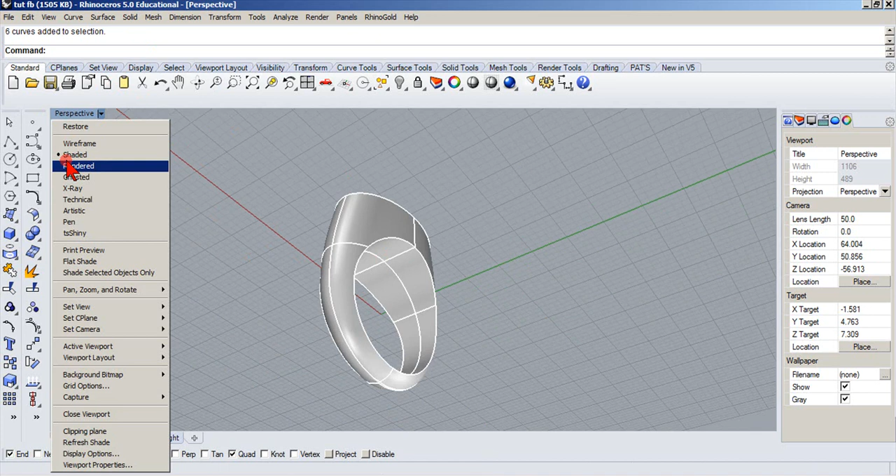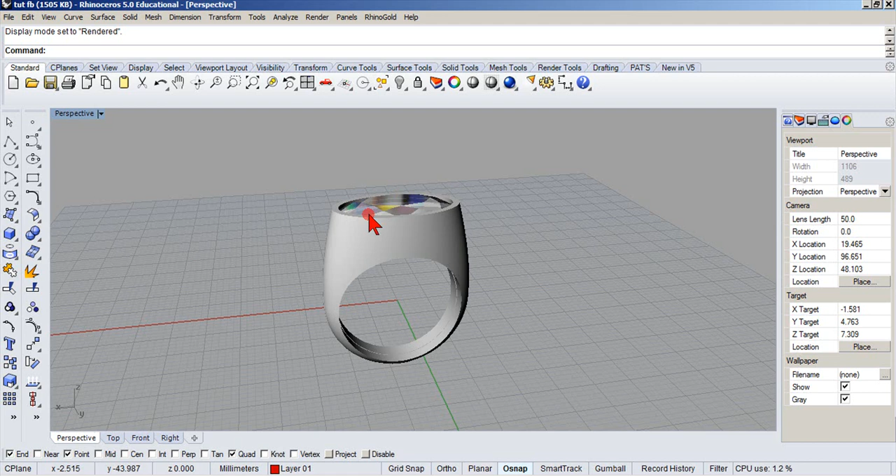Hello. I'm going to show you the tool I use to make this type of ring. I like a man's ring, and sometimes a lady's ring, with a solid back on it. But when you make these rings, if it's all solid inside, it's going to be a lot more expensive on the weight, and it'll be top heavy. So if you look at a class ring, a typical round or oval class ring, it's actually hollow inside the top half pretty much. I'm going to show you how we create this same effect with the tool that I use in Rhino here.

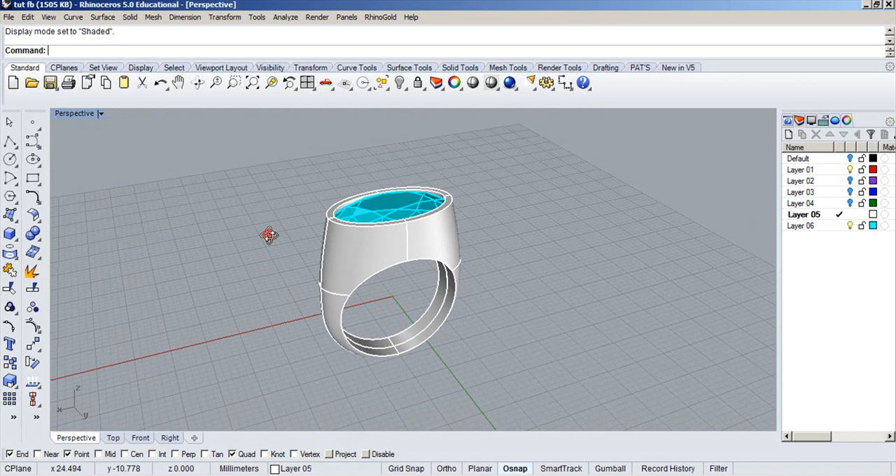I'll show you how to do it. First of all, we've got to learn how to make the ring. Let me show you what this looks like when I say hollow inside. You can see all that has been eliminated, down the shank. I could even hollow it further down the shank, but that's up to you. I'm just going to show you how to do it, and you can do what you want with it.

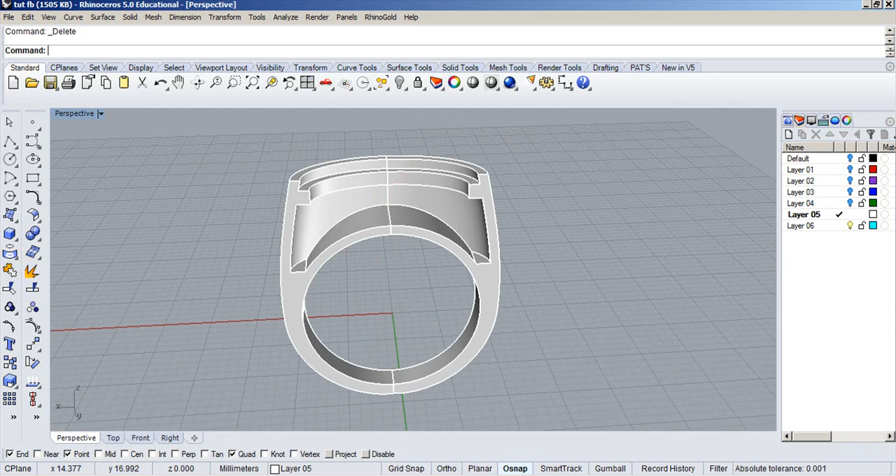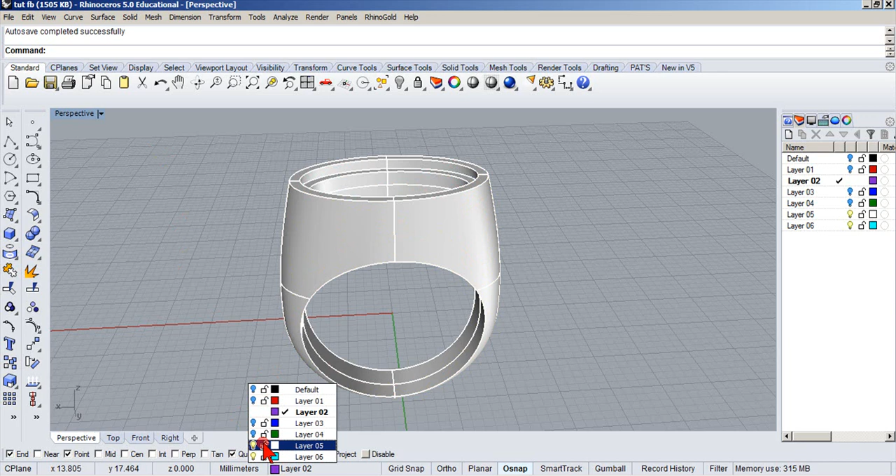So what I want to do is show you how to make the ring to begin with. I'm going to hide that stone, and we're going to hide this. We're actually going to start off by making this - this is the foundation for our ring. We're going to draw these curves, and then we're going to go from there. It's relatively easy, and hopefully we'll get through it without too many mistakes, at least on my end of things.

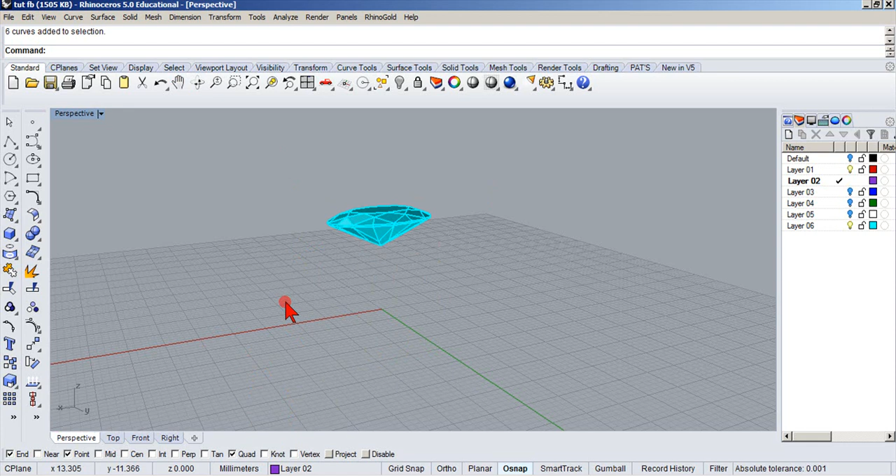So let's get busy, we're going to draw these curves, and I'll just hide this for right now. Now I do have a stone - it doesn't matter what you do it with, but for this I'm just showing you what I have. This oval stone measures 17 by 10. Now I'm going to want 1 millimeter around it to hold the stone in, on this bezel, so to speak - we'll call it the bezel, the rim. So anyway, let me hide the stone.

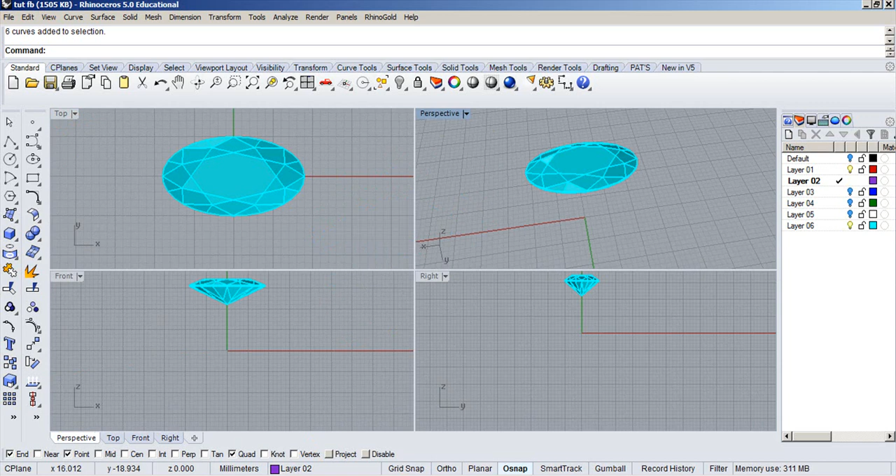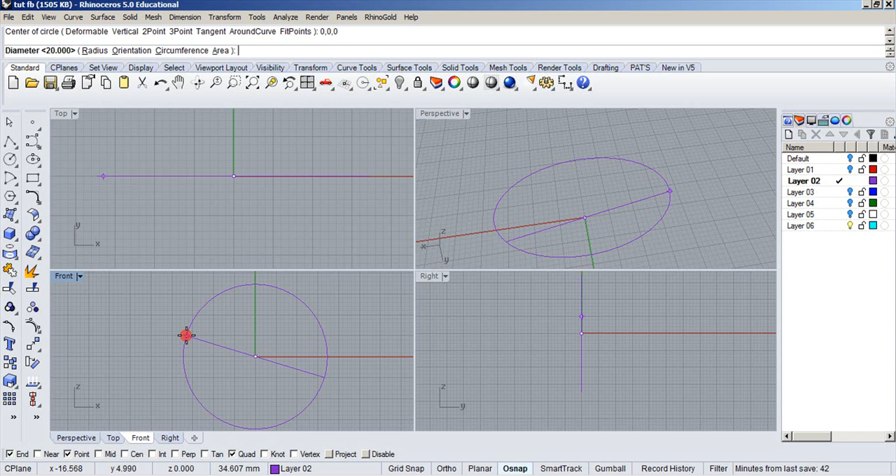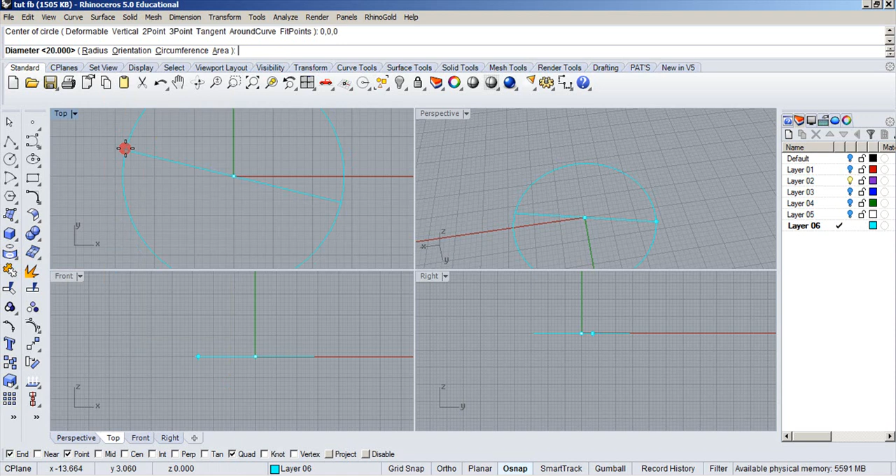We're going to start off with about a 10 millimeter, size 10 man's ring, which is approximately 20 millimeter. We're going to put 20 millimeter and round it up from 0, and type in the diameter of 20. There's our diameter 20. Let me change this color here, but what I should do is change layers.

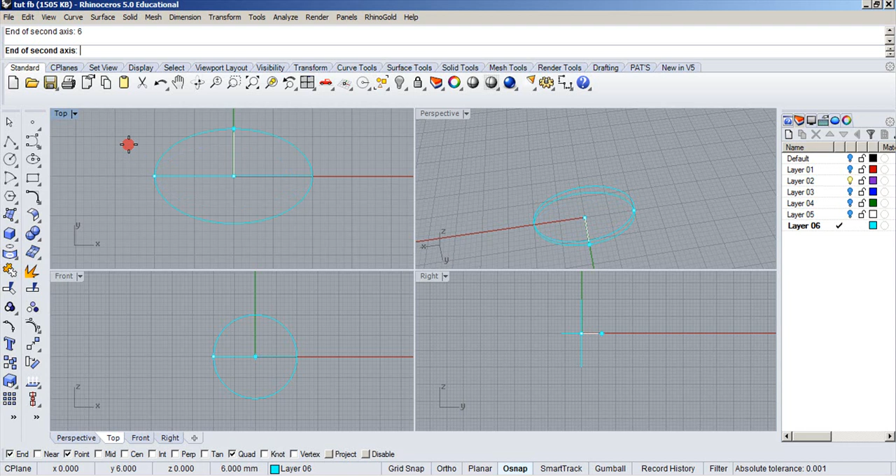We'll go with a circle from the center, and we'll go with 20. There's the finger size right there. Now we want to make the oval - the stone is 18 by 10. We want this oval to be 20 by 12. So starting from the center, we're going to go 20 by 12. And there's our 20 by 12 oval.

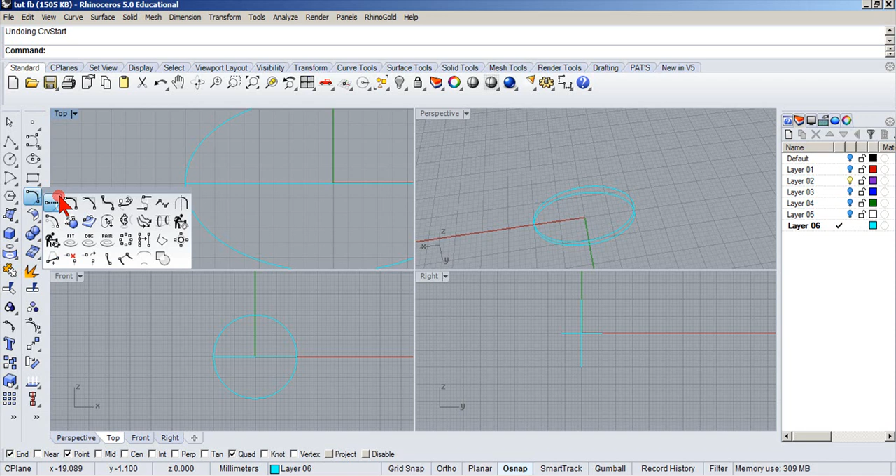I want to turn this on for a second to find out where this point is. Now let me see if I can do this. I want to go over here and move that point a minute, if I can find it. I'm going to go with this one - the seam, basically, there's a seam. I just want to move the seam out of the way a little bit, so it doesn't mess us up when we're doing any of our cutting.

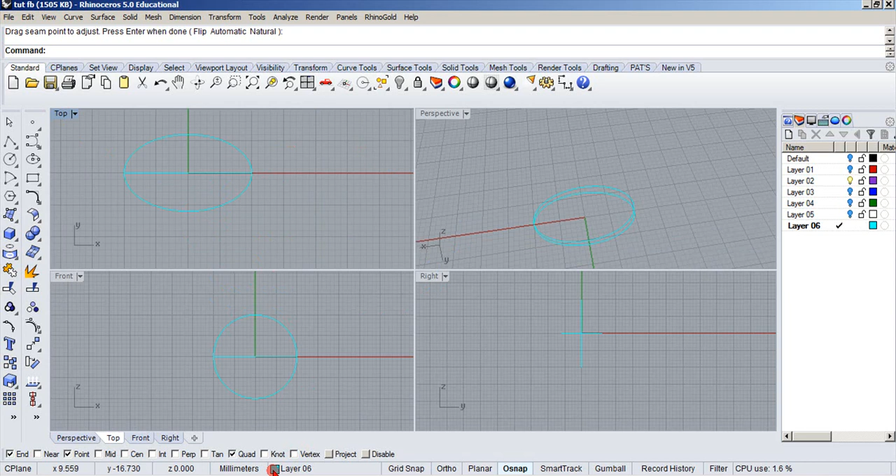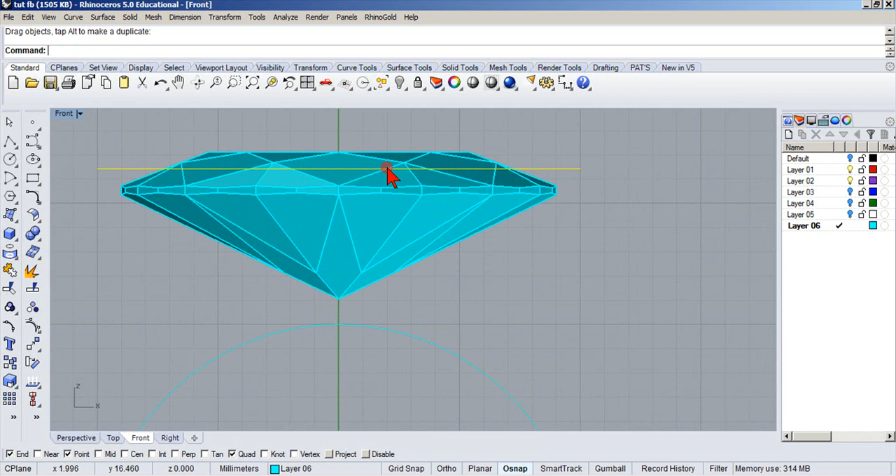Alright, we've got that. Now I've got that gemstone, let's bring it back in. I want the gemstone 1 millimeter off the finger rail, so we're not hitting the finger or going through the finger at all. There's my oval, I'm going to bring it up, and I'm going to bring it up about like that. Do it where you want - you'll see at the end what's going on. Just so you can get a good idea where we're at on this thing.

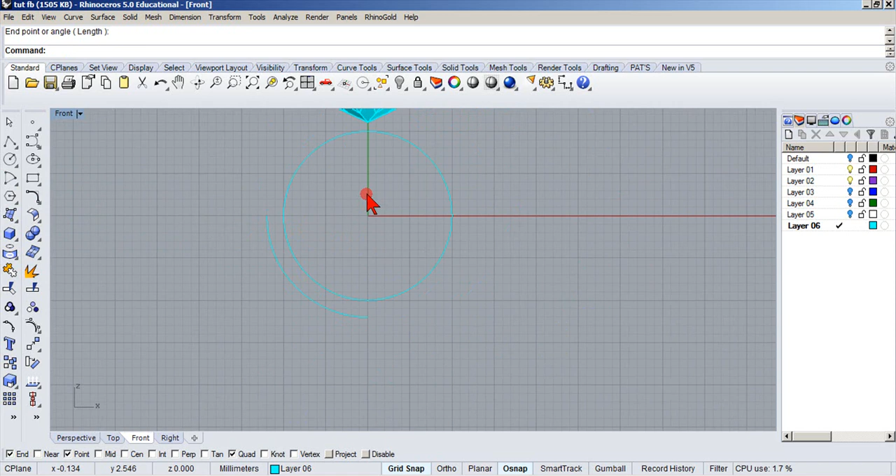Well, let's make a shank, or continue on - take an arc. I'll put my snap on, and I'll just make it 2 millimeters for right now. You design it how you want to design it. Now we're going to turn on our quad, yes, and our end. Come over to this tool, I want to extend it. I'm using Rhino 5 right now, but 6 it's a little bit different, 7 - but they're all the same, the tool layout is just probably in different places.

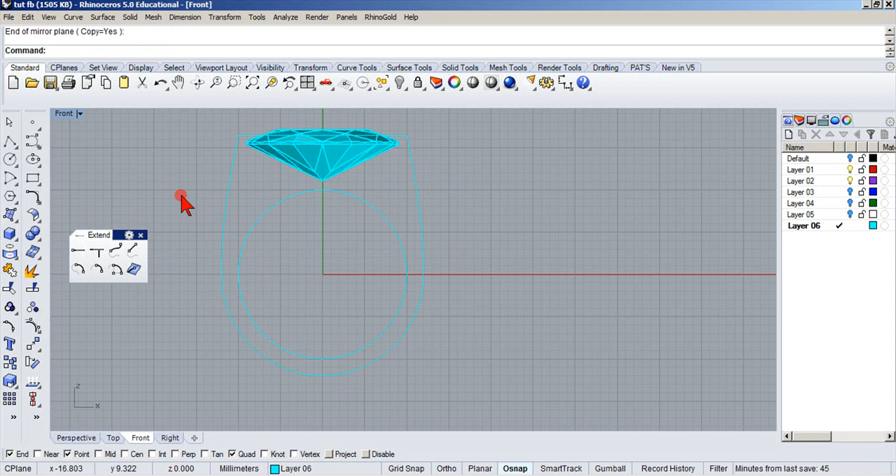I'll turn on my snap, and I'll come up here, and I can grab that quad there. And then I'm going to mirror this from here to the end. So this is what we have so far. Now I'm going to hide that stone again.

I'm going to put a point right down here. If you want to put a point, go for this quad and that quad. So you can see I've got a point down there and on the two ends of the quad of the oval.

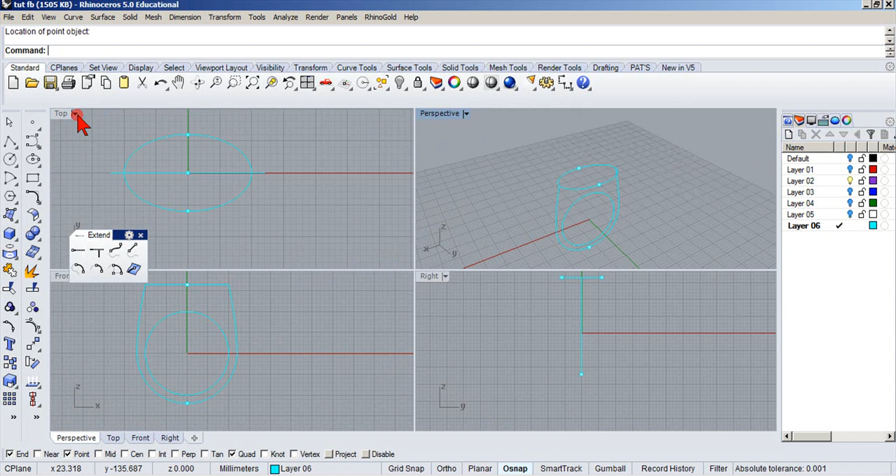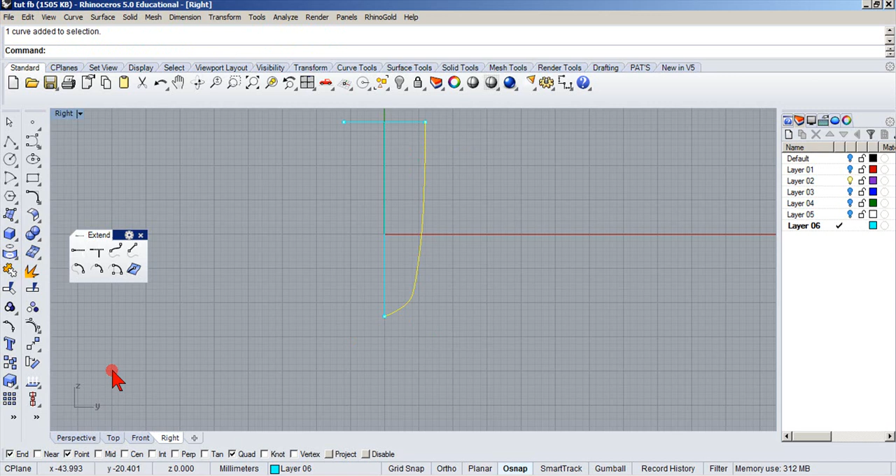Now one last curve. We'll take our curve and grab it from the quad. You can design this however you want, but we'll do it like this. Right there. Now I'm going to mirror this from the end. Mirror it. And there it is, right there.

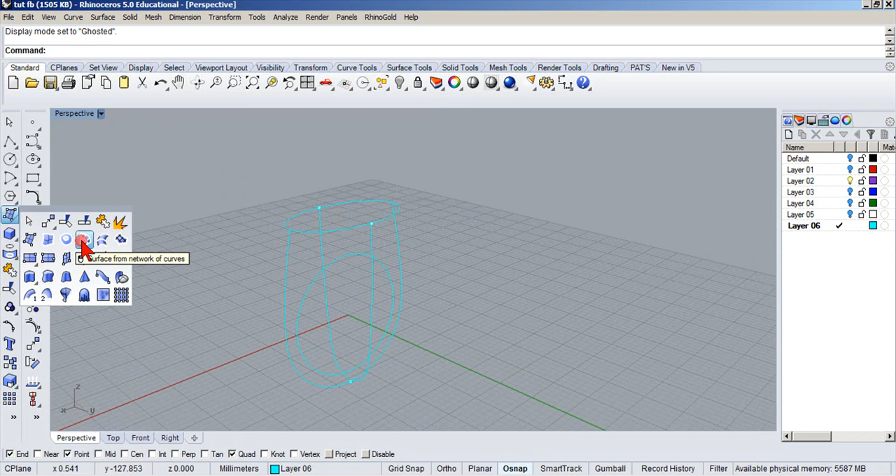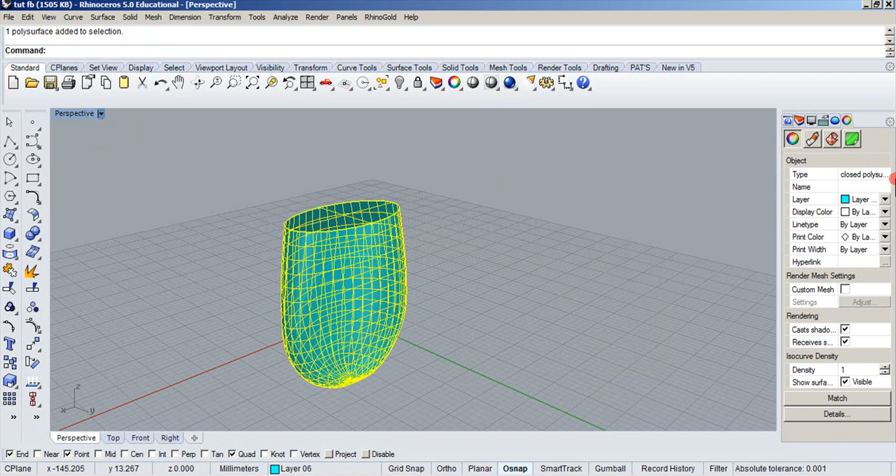Now we're going to keep our fingers crossed and hope everything turns out good. We're going to do our network surface, surface from network. We're going to pick up all these curves right there, and if everything turns out, you get this. It'll come up, so we click OK. Now we're going to highlight that and cap it, and just so we know, it's a closed poly surface.

Now we're going to grab this finger rail there, extrude it out. We're going to boolean difference it. We have this.

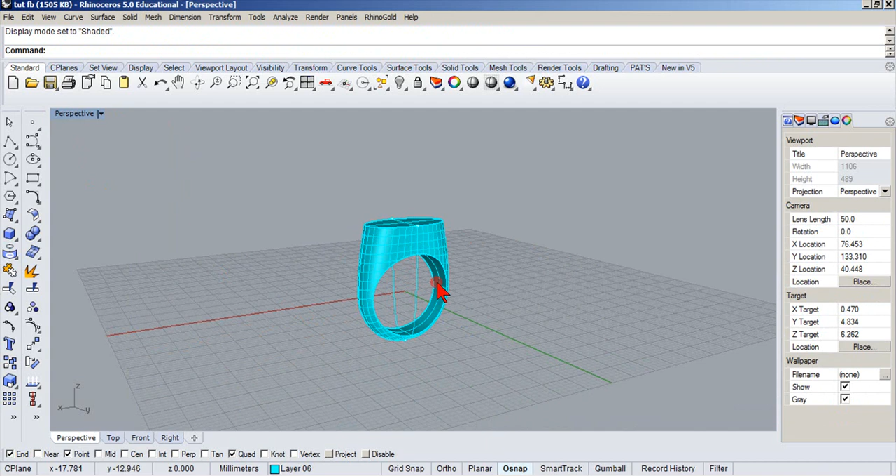The issue with this is that when you do this, the bottom's always going to be funky like that. So what we're going to do is fix that. Let me select the curves. I'll probably hide those for right now. We'll hide them and start with some new ones now.

Okay, let's fix the bottom of this shank. Let's draw a line, just a line from the center. We'll go like that. These are things that when you do it, you put them where you want, these lines and everything. Alright, but this is just for showing.

Let's cut that out now, and we're going to trim this out. We'll cut this, and then fine, let's just draw a little arc, and we'll go from end to end right there.

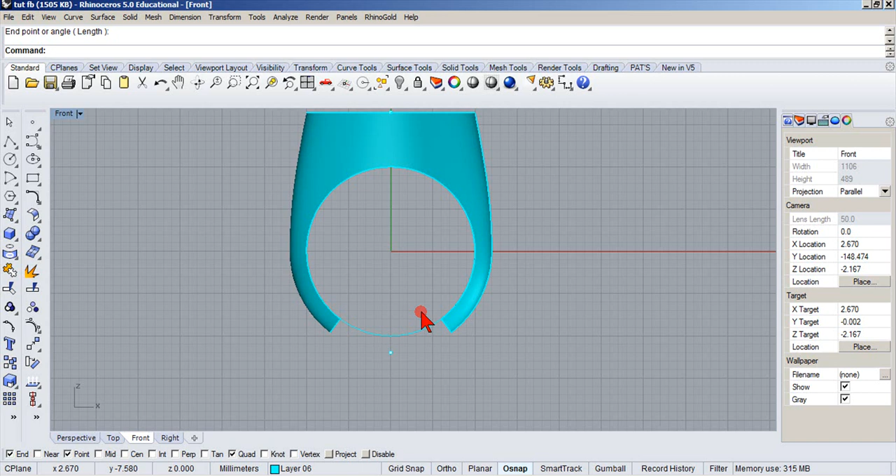Now we're going to do a one rail sweep to fill that gap in. I'll do it over here so you can see. We'll go with the one rail sweep. Grab this one.

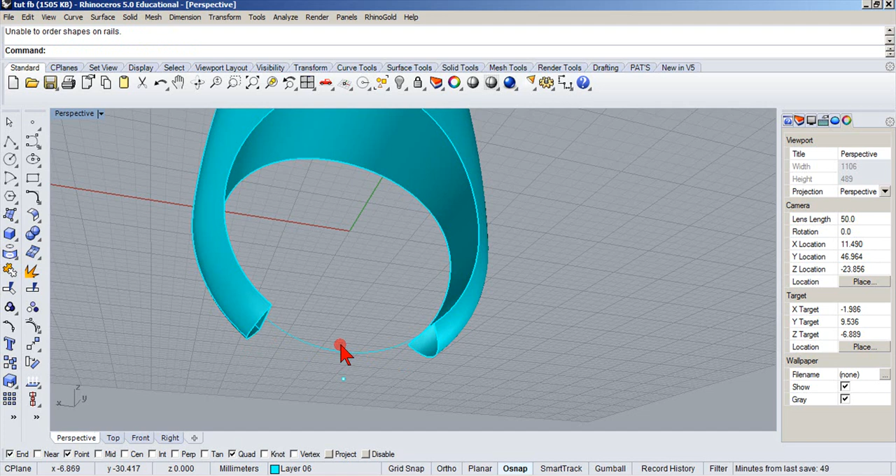I'm not sure if we can get this like this. No, okay, on this one I'll have to duplicate the edge. You don't always have to do this, but let me just duplicate the edge there. And then we're going to join it. And now we'll do this one rail sweep again. We'll grab this, I'll grab this.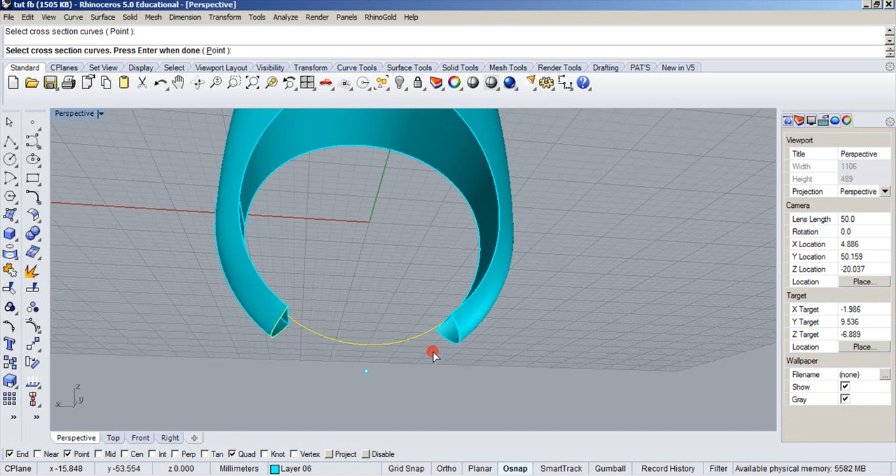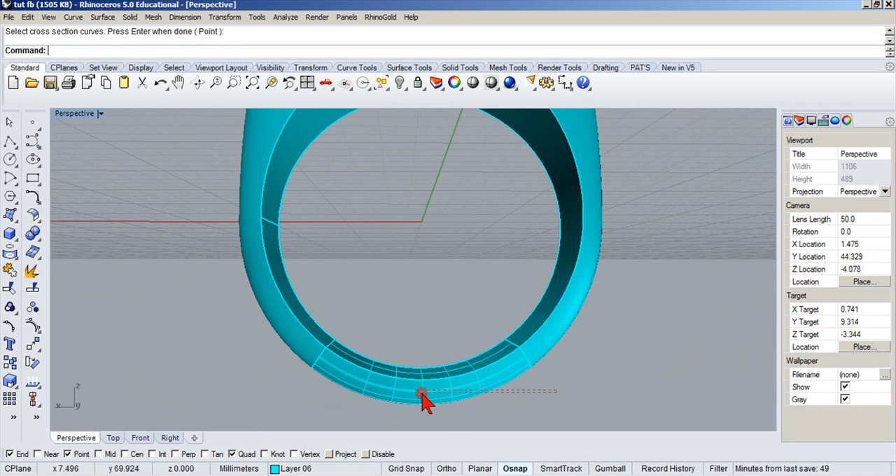Okay, and then we're going to do this one, line right there, that, this one, and as you can see, this one. Okay, I'll do them all and join it, and you can see it says closed poly surface. We're going to turn off the ISO curves, so there's our ring.

Alright, now here we go. We're going to use this tool right here, which I like: shell closed poly surface. Well, I'm not going to use that one yet. I'm going to make this kind of dramatic, so we're going to take a line to pick where we want the hollow to stop. For example, I'm going to take it a little bit further down than normal. I want it to stop down there.

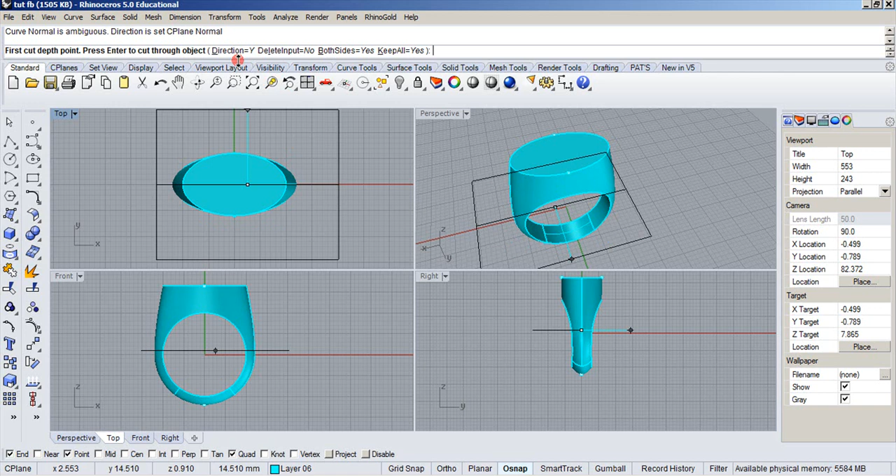I'm going to use a wire cut. I'm going to grab this, and I'm going in the Z direction, or in the Y direction. I want to keep all. Let's see, we should have...

That's a closed poly surface, and that's a closed poly surface. So we have two poly surfaces, and they're closed. Excuse me, delete that.

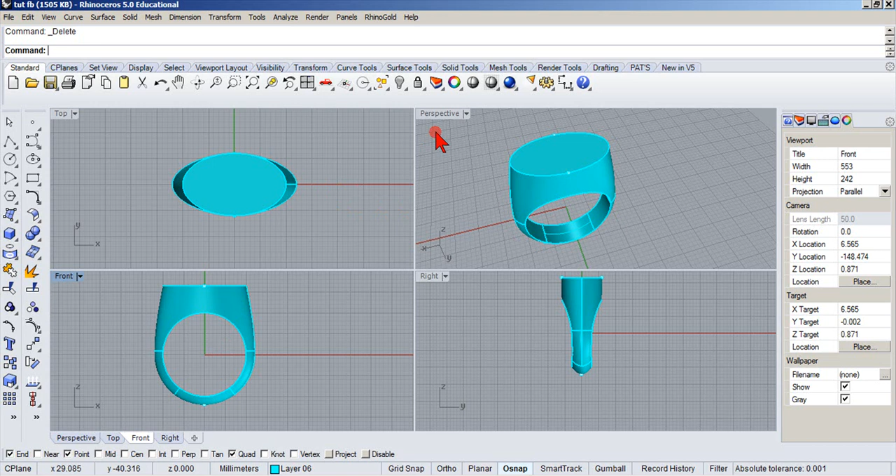Now let's go to our tool here, shell closed poly surface. We're going to shell it, and it's 1 millimeter thickness. Let's see, alright, and there we have it.

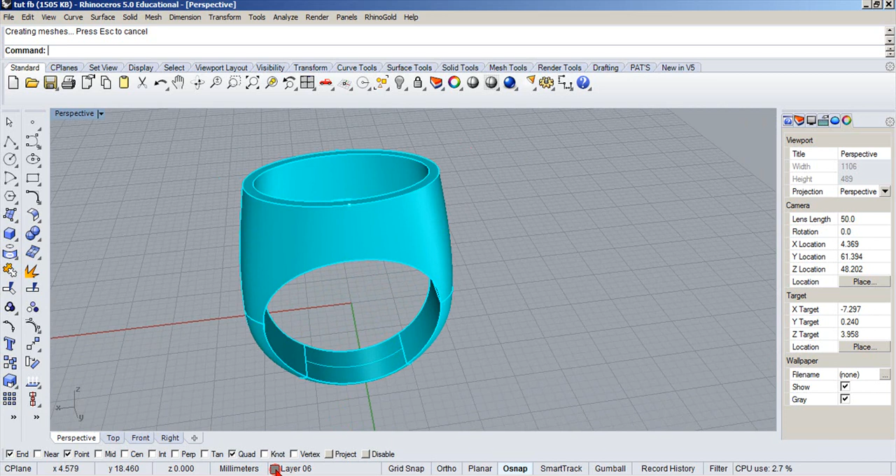Now let's just see how we did so far. Let's bring our stone in. There's our stone. Let me just change the color real quick. And there's our stone. Now I'm going to hide that stone again. Hide stone. Alright, so let's show you what we have here.

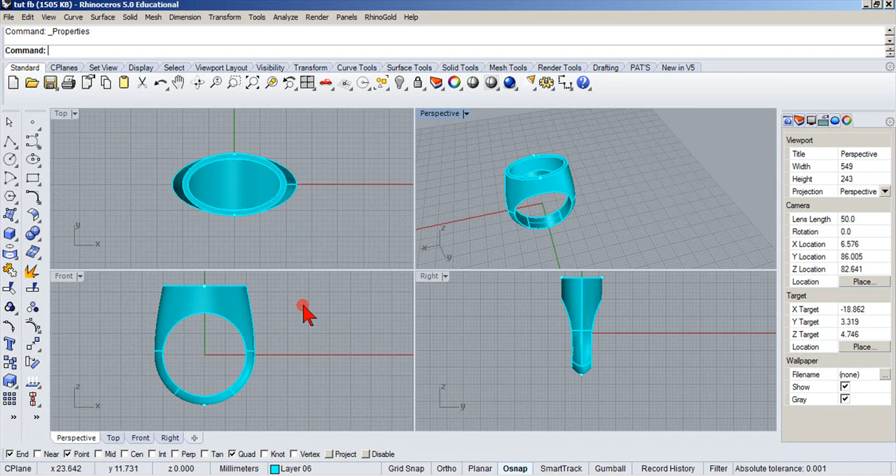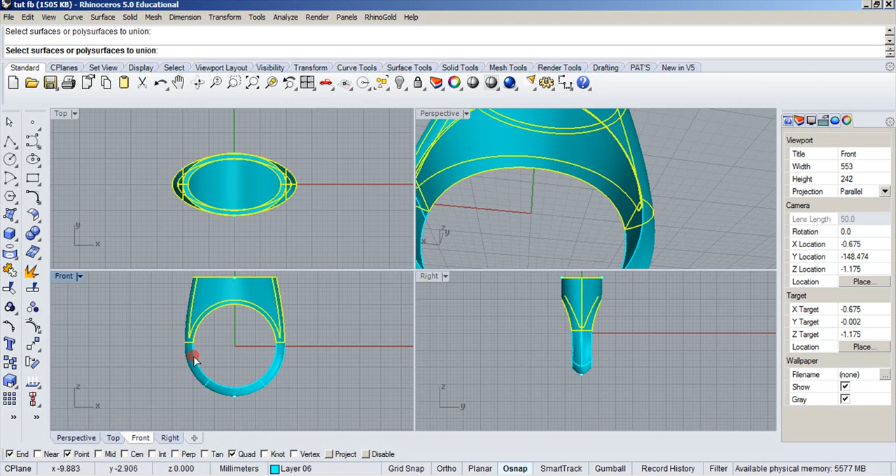Well, first of all, we've got two surfaces, closed poly surfaces. So there's a surface on each half there. We need to get rid of that. No, we don't need to get rid of it. We can either get rid of it and join it, or we can boolean it together. Alright, for the sake of this, let's boolean it together. It should be one closed poly surface. There it is.

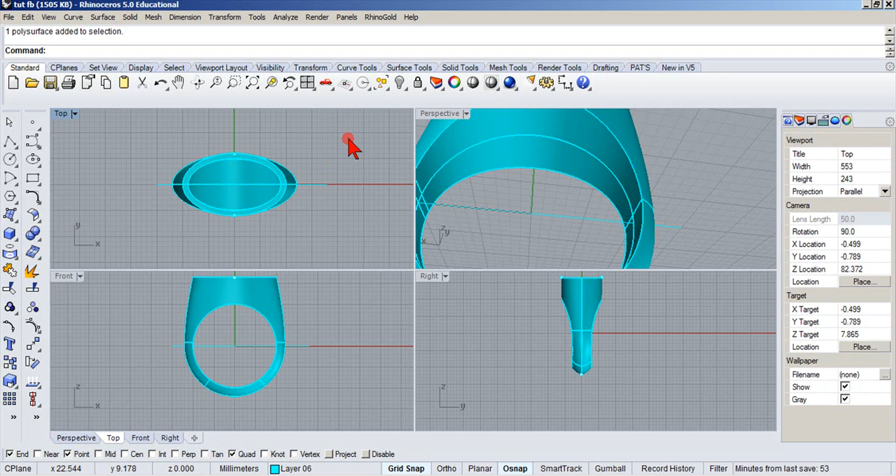So what I want to do is, let's see if we can do this real quick. Let's see if I can get a wire cut on here. This time I want to cut it in the Z direction. Okay, now let's show you what we have here, just so you can see. Let's see if it's... there is your hollowed out surface.

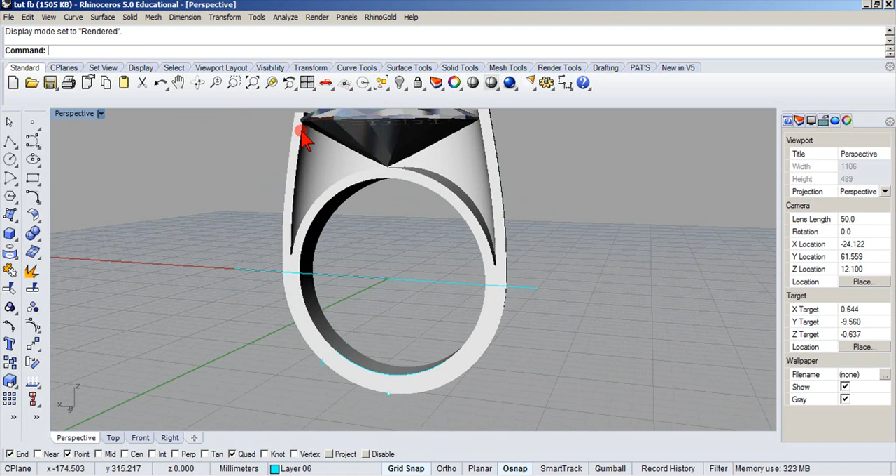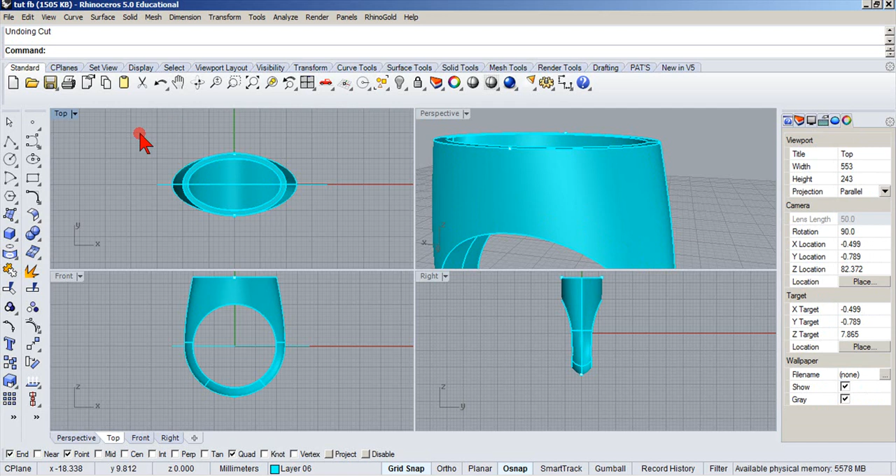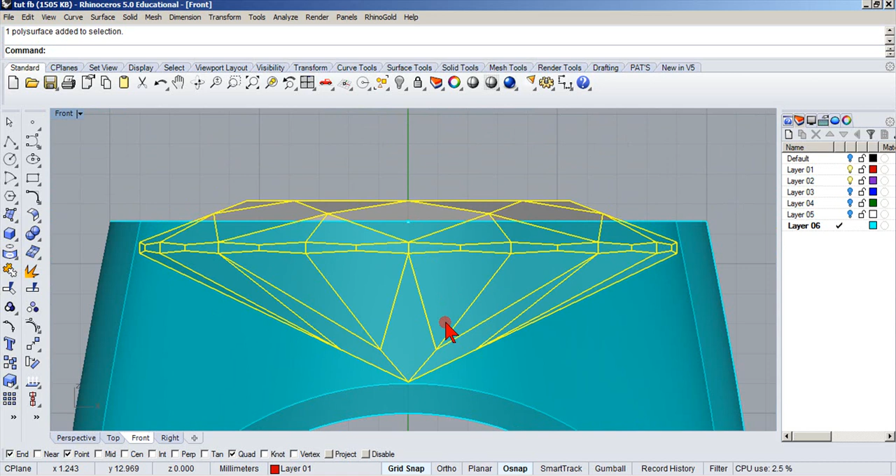And there you have it. Well, we don't have it yet. Okay, let's undo this. Do it some more. There we go. I'm going to bring my stone in a minute. I might want to raise that stone up just a moment. We'll check it out real quick though. Let's see. Nope, we're off the finger rail. Alright, I just wanted to check that.

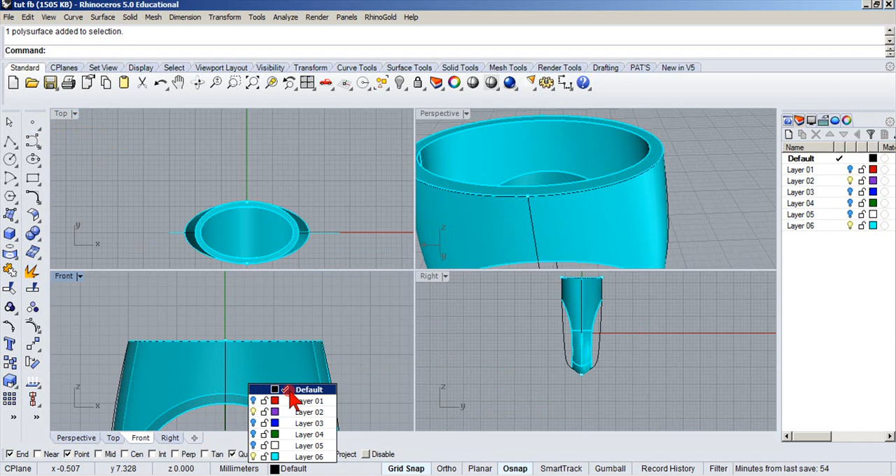Alright, so what we want to do here is one last thing. We need to make the rail, the stone sits on it. I'm going to turn this black on. Let's make a curve, an oval here from the center, and we'll go out 17. It was 18 by 10. Let's take it 1 millimeter in, so we're going to go 17, and 17 by 9 gives us there. Now, I'm going to want to, let's see the wireframe.

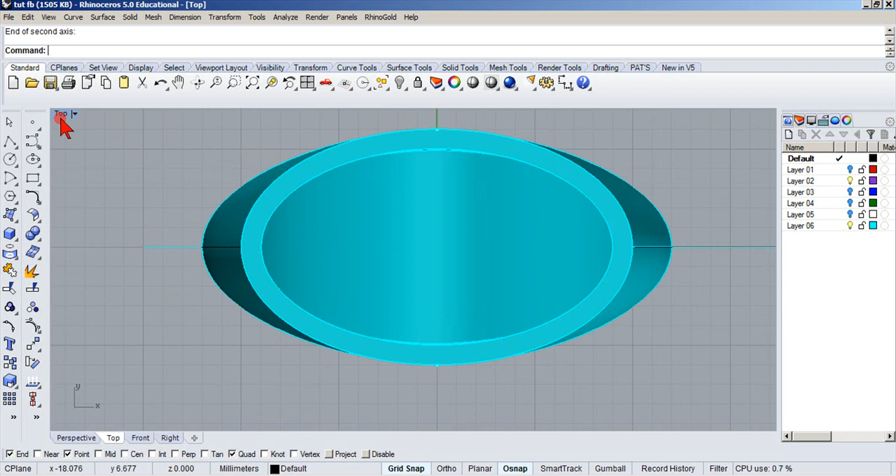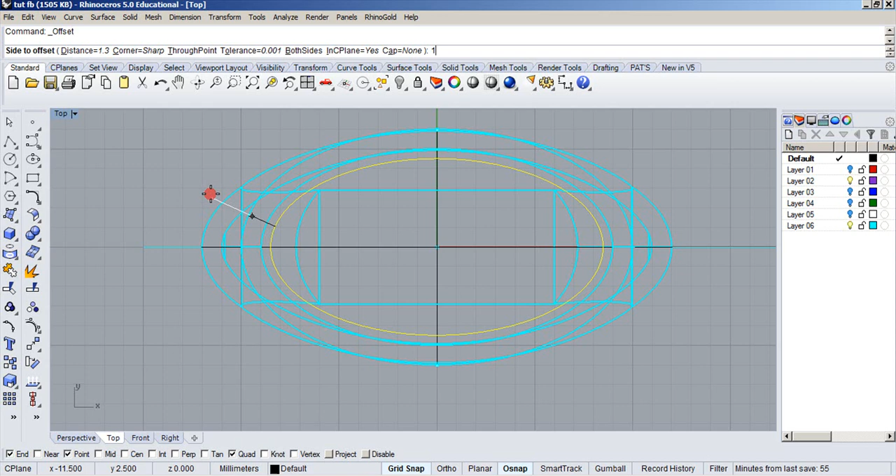I'm going to offset this one. That's our hole I just drew. I'll just offset it, and I'll go 1 millimeter. And there it is right there. Now I'll grab both of those. Okay, it should be down here, down the bottom there. I'll extrude it.

Oh, let's just take it, sides, no. Let's take it 1 millimeter. How's that sound? It's enough to hold the stone. You do whatever you want though for right now. 1, 2, how's that? Enter.

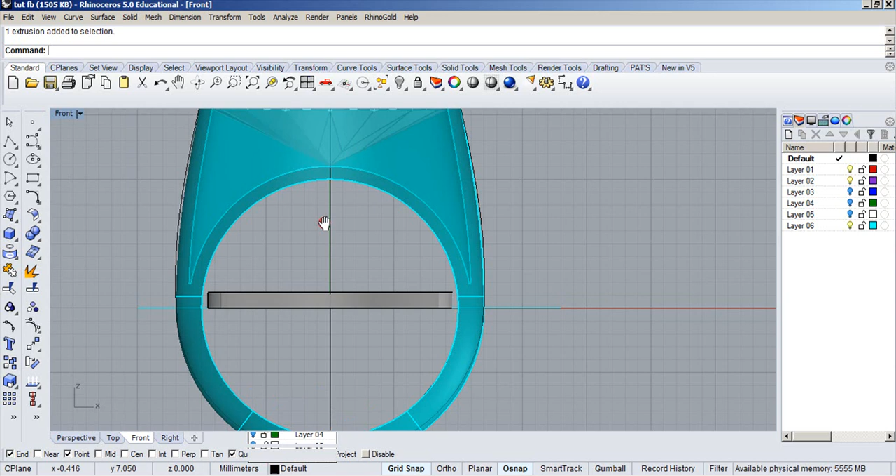Now, let's bring in my stone again. There's my stone. Let's take this and bring it up. About there. You can adjust it wherever you want. And let's do a high. Let's hide that stone a second. Hide the stone.

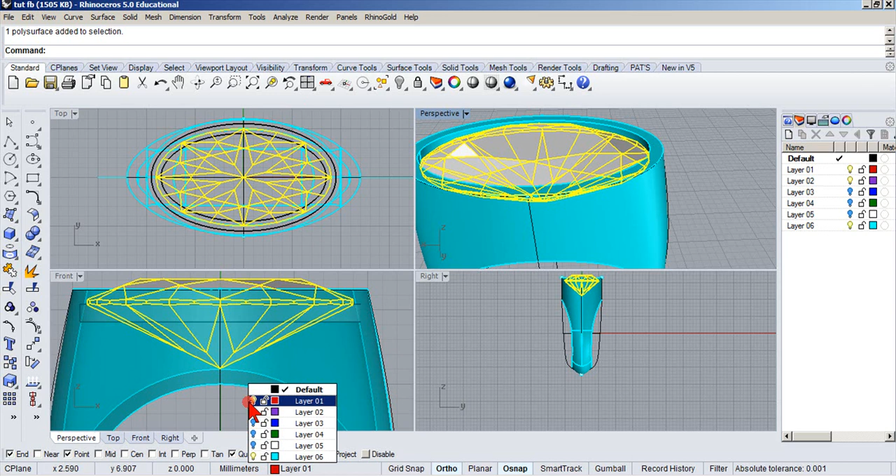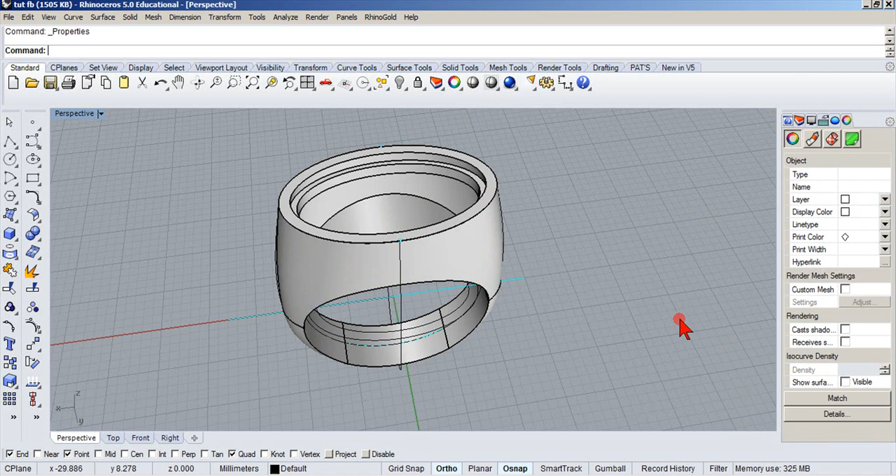Now, let me boolean that together. Let me try that one first. So we can get this one, and turn the iso curves off. And there. Let me grab all the curves. I don't need them for right now, so let's just grab them and hide them. I'm going to put one curve so we can show you how it looks.

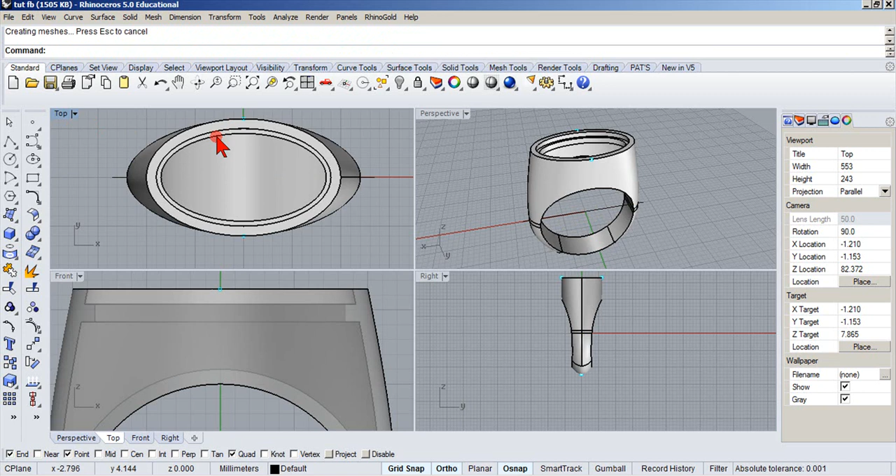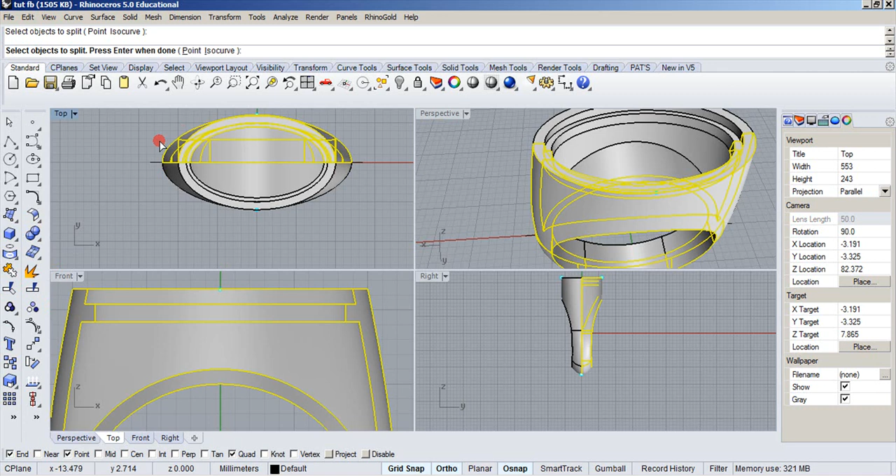And we'll do another wire cut. Now we're going to go again with the Y direction. And, oops. Okay, due to one of my lines right there, I was talking about earlier, I have a hard time to wire cut it. So this one, we'll split it. So we'll split, oops, sorry, I think I already did it. Let's see. The wire cut is giving me an issue, so this one, I'll just do it this way. I'll split it. So we're going to take this and split it with that curve.

Now, what I want to do is, I got 2 halves, I'm going to cap them. This is just so you can see. I'm just doing this, the ring is done. You don't have to do this, but I'm just showing you so you can see what it actually looks like.

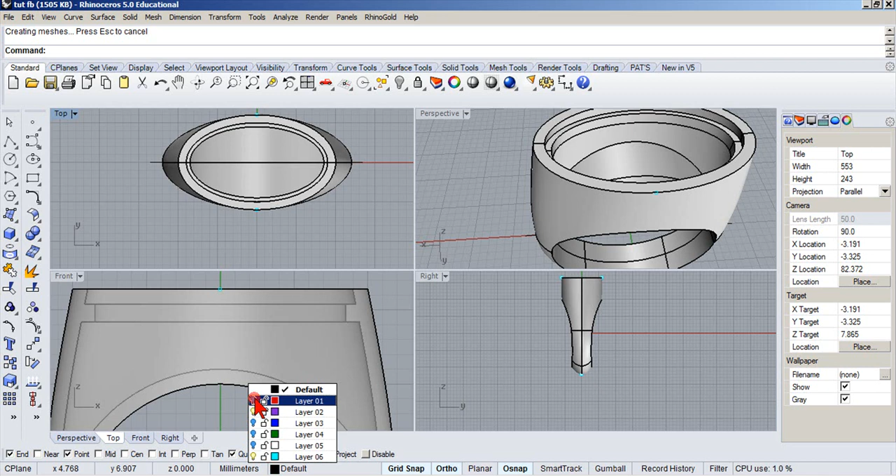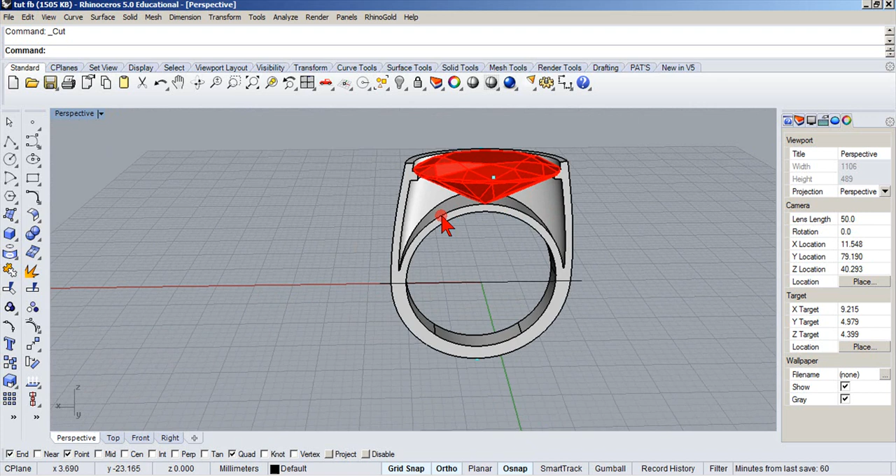Alright, and let me bring the stone back in. I'll change the color of the stone this time again so you can see it. Now, we'll cut this, like I said. There you go. You can see how hollow it is and how much metal has been removed. And you've got a 1 millimeter shell all the way around this.

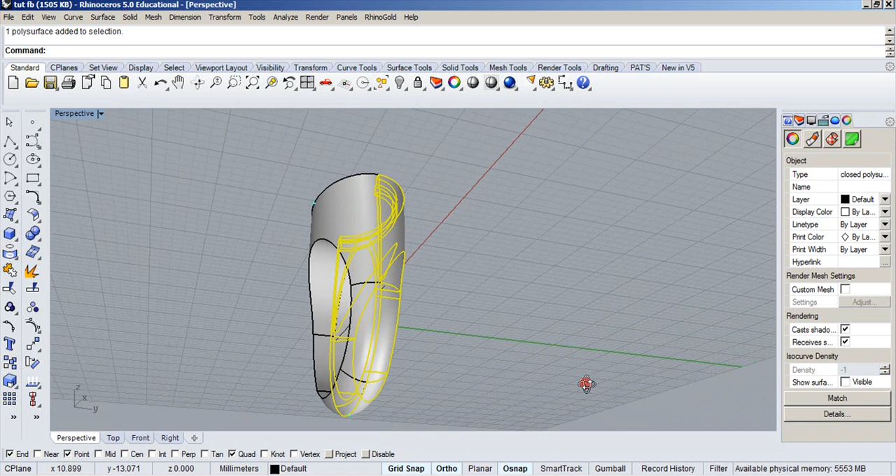The ring is done. Let's see one thing here. So there's your ring. Oops. It's a closed solid poly surface. Oops, so I didn't do it. I gotta go back some more. There. There's your ring. It's a closed poly surface.

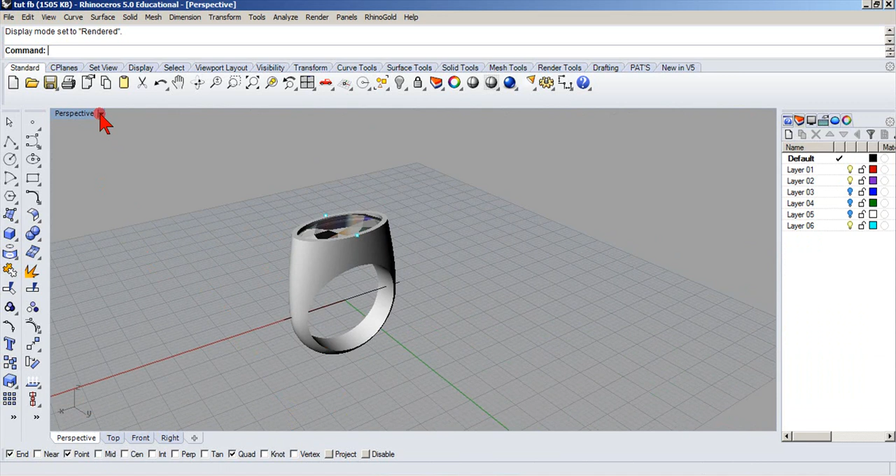And you can do whatever you want. You can put your designs on the outside or whatever. I'll tell you what we will do, since we're at it, let's chamfer the edges. But as far as designing your ring, it's up to you. You design it how you want to design it. But this is how to do it with the closed back, hollow on the inside.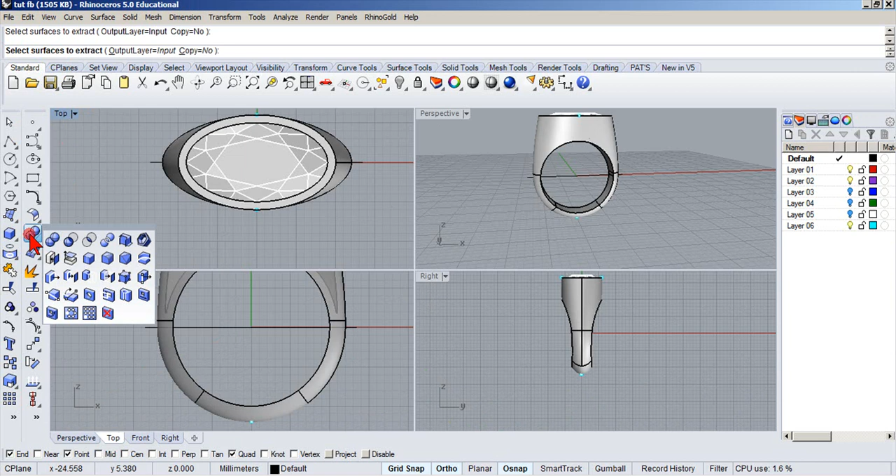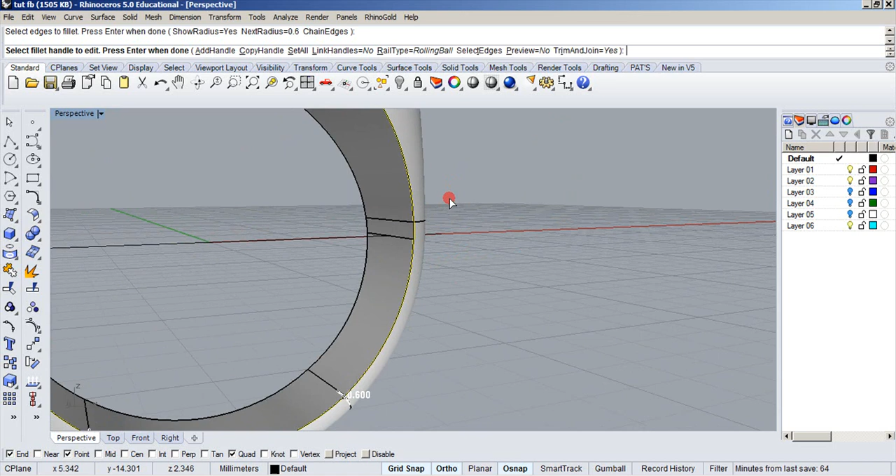All right, we might as well sweeten it up just a little bit. We'll fillet the edges. Try to grab them all. There you go. Grab that one. This side. Oops, let's see. I don't know why a little bit of surface is in there. I think I know why, but that's okay, we'll get it off.

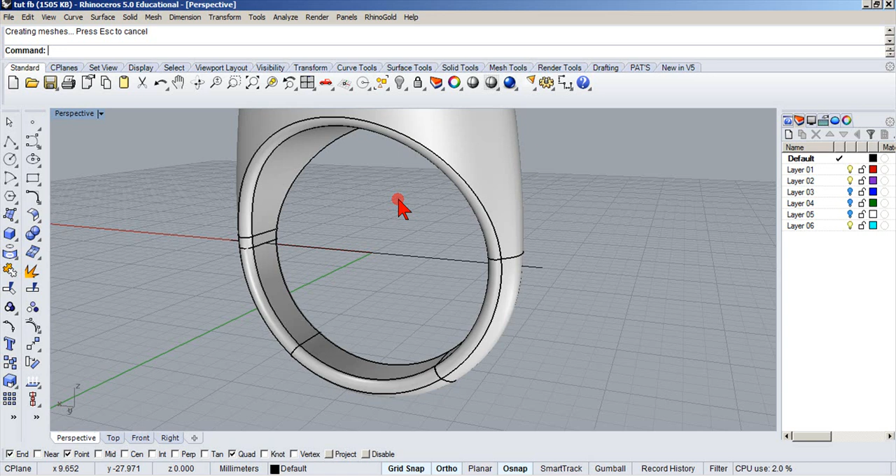Okay, and then we'll just do this one over here. We'll put a little bit of, let's just check around here. Alright, let's go with, let's just try a 0.5. Let's see how it goes. Oops, too much. Let's put it on. Didn't change it. Remember, 0.5. There we go. There, changed it to 0.5 there.

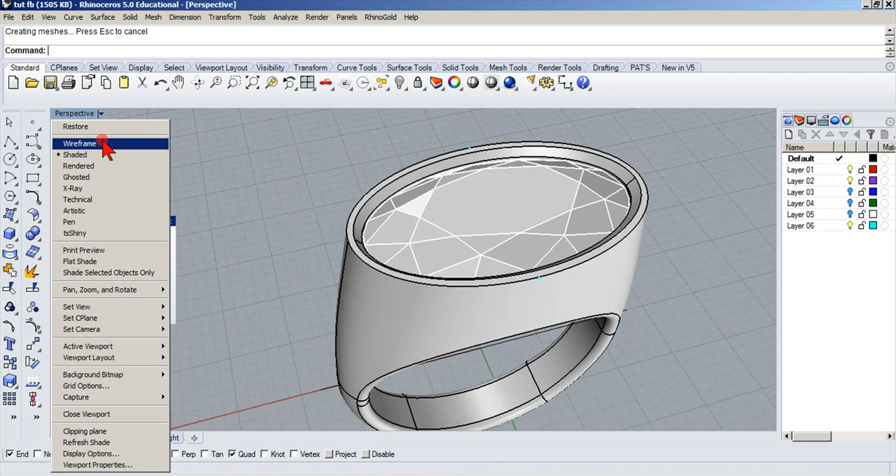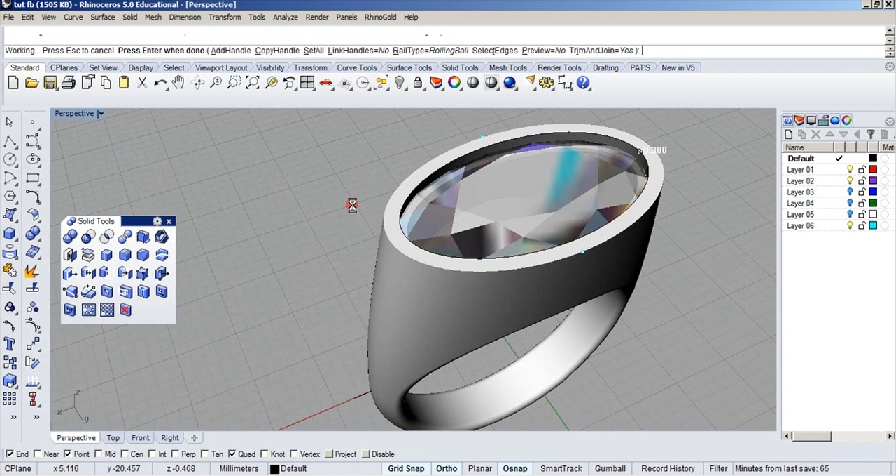I could do less than that, but you know, it's up to you. I'm just showing you what to do. I'll probably go with a 0.3 instead. We'll do it just for fun of it. Alright. Let's see, we'll go 0.3. Alright. There you go. Or if you want to do the outside edge, it's up to you.

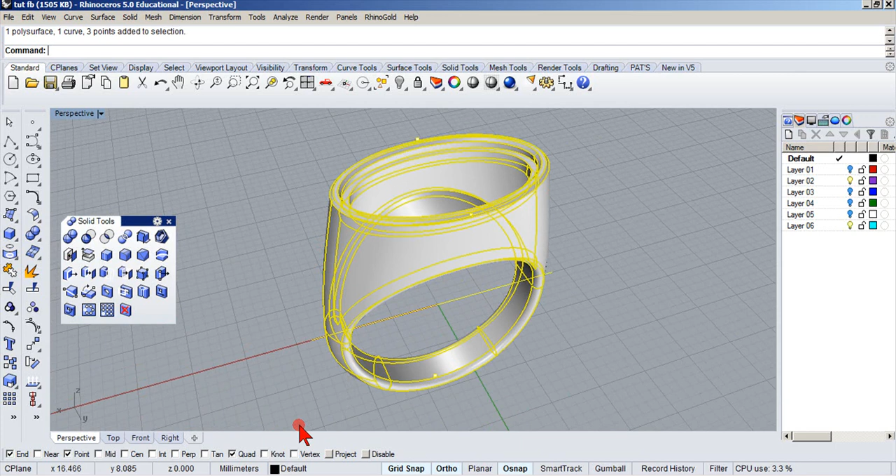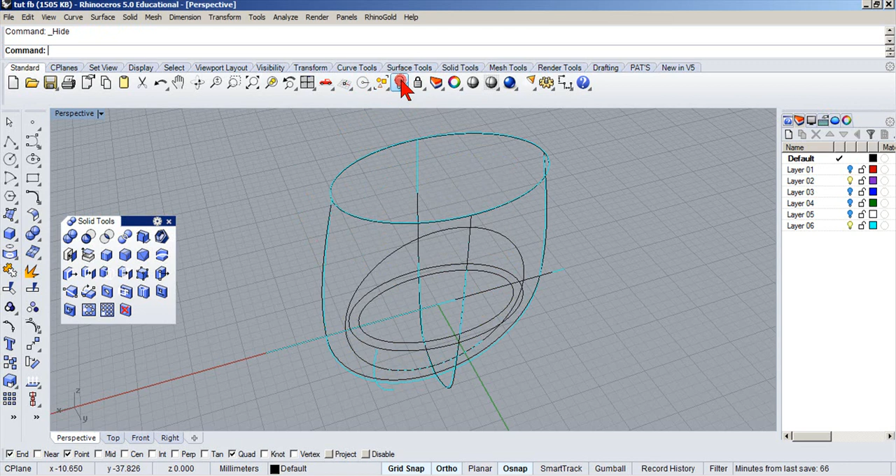Anyway, the main thing was the making that hollow. Alright, now let me just hide this a second. Let me select my curves. Select my curves. My selection and hide there. Now again, there was our curves. Let me see. Basically, that's what we used to make the ring. Remember that part. Alright, that was the main thing about that was the shell command.

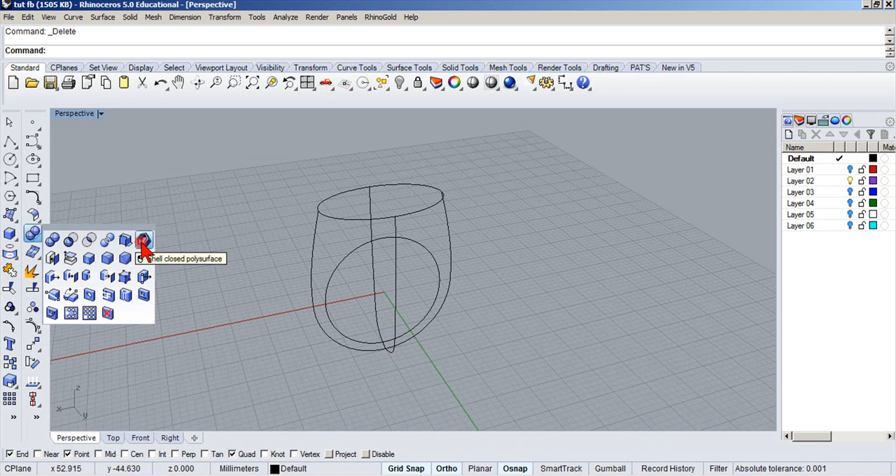Shell closed polysurface. Hope you learned something today, you can use in the future. Again, you can design your own outside of the ring, do whatever you want to do. It's just a basic the shelling command. Good luck, have fun.